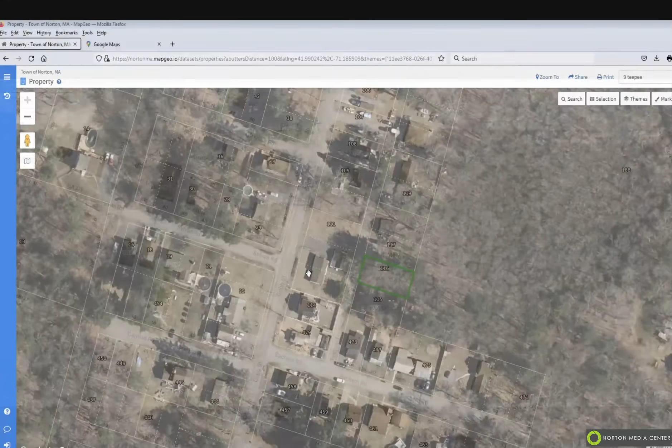This is the assessor's map with the aerial view overlay. Do you guys see that? Yes. So the green is the subject property. This is as far zoomed in as I can go on the assessor's map, so just bear with me. If you can see my cursor, I'll give us some reference points.

This street right here is Cobb, and then Sachem Road comes off of it this way to the east. And then Teepee runs north from Sachem. I have a couple further illustrations I want to show you, but while we're on this page, that's a town accepted road.

Sorry Cameron, I don't mean to interrupt, but is that a town accepted road, Teepee? I don't know, is that a private way? I think there's sewer service on that street, so I don't know if that makes a difference. Frank, is that an accepted street? Highway did accept that road. It was done prior to, I believe, Keith being in the seat that he is now. I think that might be back when Carl was in place. But yeah, there is sewer on there as well.

Okay, so Teepee Trail is this roughly north-south road here. Other abutters to the north are 11 Teepee. That's an existing home that just went on the market; I'm not sure if it sold or not. Further north, I show here 16, although it's the same side of the road—I'm guessing it's 15, maybe my eyes are failing me—but it's also on the east side of the road. My understanding, and Frank can confirm this, is that these two homes have service provided by private independent water lines that run down Teepee and tie into Sachem. I think that's the case, that's just my understanding of the lay of the land right now.

Let me see if I want to try and share a different view. Can you guys see that? Oh, move this window away from the shared application. Do you see the new window, the new graphic? I do not, same one. All right, let me see. New share. Combo, this one.

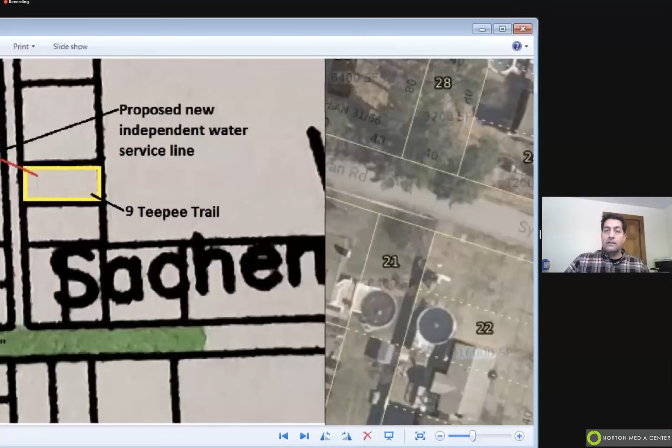Okay. There you go. Yeah. Okay, so this, now that we've had the perspective, on

Now that we've had the perspective, on Cobb Street we have an 8-inch main. This is a close-up of the sewer map on the wall outside the DPW, which I took a picture of. And this is the 6-inch on Sachem. The yellow is 9 Teepee Trail.

The proposal is to run a new independent water service on this red line across. This is 55 Cobb Street. We've spoken with the owners there, and they're on board if we're allowed to do this, to run the service across their line and then across Teepee, so that there's as little impact as possible, and then onto the property.

You're talking half the distance then, it looks like. Yeah, maybe a little more than half. It's a kind of strange little jog there, and we're doing that to avoid her garage. The field will be a little cleaner than this, but this is all the photo paint shop would let me do. Obviously, it'll be a little cleaner, but that's essentially it.

We put a curb stop off the property line over on Cobb, so that we can have control of the service there. And the size is going to be to standard, for however DPW would like it.

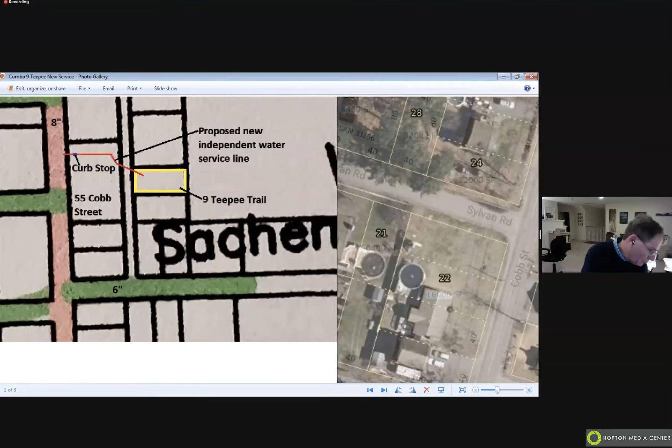Moving right along now, we are a little early for the West Main Street Cumberland Farms. Do we have people here from that group?

Nope, am I the only one that can't hear him? Tom has a real bad connection. Okay, yeah, I'm not hearing him. Oh sorry, Tom, we're having difficulty hearing you. Sorry. I'm John Marchand from Farland Corp, I can kind of give you an overview of our project. Thanks, yeah, trying to get you there, John, you're a little low on volume. See if I can adjust this.

John Marchand from Farland Corp, better. We're the civil engineers for the project. I'll give an overview of the project while Tom figures out his connection issue. Our project site is 60 West Main Street. If I could share my screen, I could show you the site plans that we have. That'll be helpful, great.

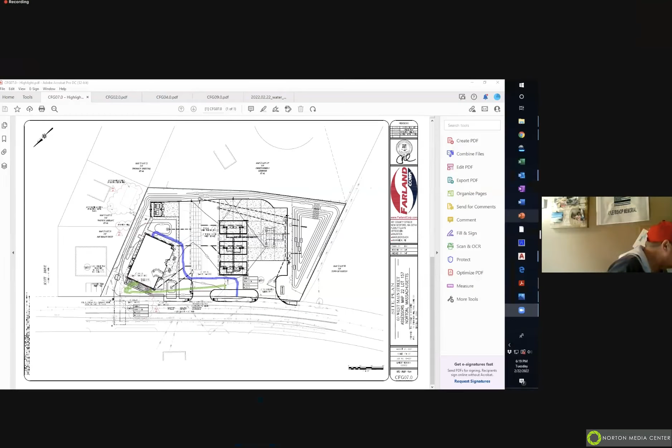If everyone can see this - so this is our site utility plan. The project site is 60 West Main Street. It was most recently the site of, I believe, a Bank of America. This is the Yelle School to the right of the plan. It's a vacant lot right now.

This project was originally submitted through site plan review planning board back in 2019. It went through a lengthy review process, reorienting the building and the fueling stations, and this is the final layout we got approved through all the other town boards.

It's a 4,384 square foot convenience store building. There are 6 fuel dispensers, double-sided, so 12 total fueling locations. We've got underground stormwater structures between the building and the dispensers, and a larger surface stormwater basin on the right side of the site. We've got two driveways off of West Main Street, looping around the fueling stations.

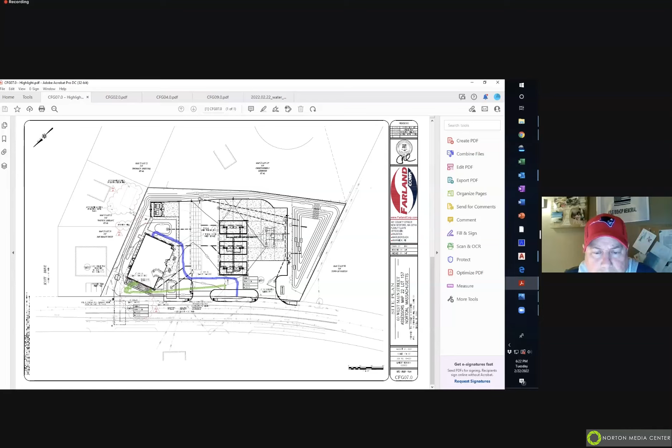Yeah, John, those tanks for the fuel - are those the tanks that we had talked about a couple years ago, where they were double walled or something to that effect? Please refresh me if that's not the correct term. Yes, these are double walled fiberglass tanks.

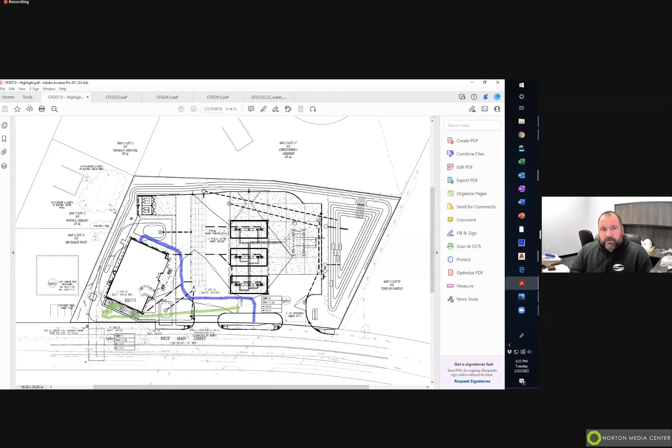Essentially there's an interior wall, and between the two there's a brine solution that's monitored. So if there's any fluctuation in the level of that solution, either from interior or exterior tank failure, it would be immediately picked up by the monitoring system, and we'd be able to fix it at that point.

All the piping is double lined. It's a pretty state-of-the-art fueling system that Cumberland Farms installs, and that did get approval through, I think it's the select board that issued the UST approval.

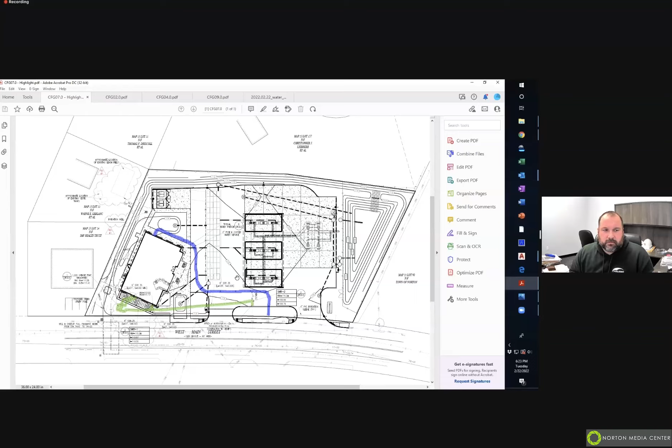Well, I think that we had spoken about that, and it was a pretty good setup from what I remember talking about. We felt that was the safest way to go to protect that area, which I believe is zone 2 - is that zone 2, Frank? It's zone 2, right on the edge, correct. Okay.

Yeah, we've been to multiple meetings, the previous board and myself, about this. Going back to 2019, there were quite a few slideshows presented, explaining the safety standards that Cumberland Farms has in place, with sensors between the walls of the tanks and multiple alarms and things. It was pretty impressive to see everything that goes in, another infrastructure that's in the ground, out of sight, out of mind. But nice to see the safety provisions that are in place.

This is a pretty basic setup here. Water on one side, sewer on the other, tying into existing stubs that were left. The 2 inch was brought across, I believe by the previous landowner during construction. They had paid separately to upgrade from a 3/4 inch service to the 2 inch that now supplies the property. And just recently, the Board of Health and myself went over the installation of the grease trap, and that was approved also by Board of Health.

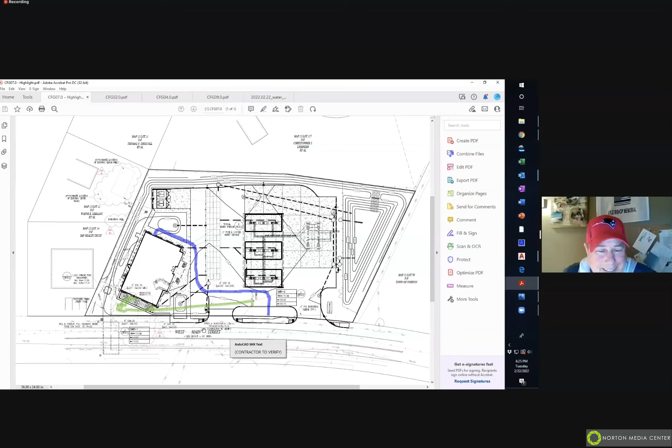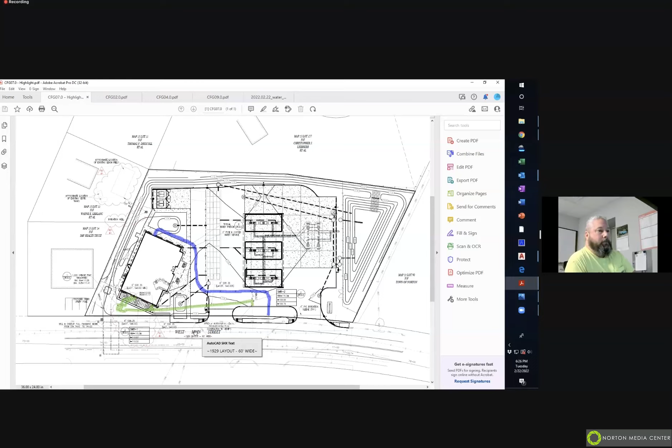Does anyone else have any questions about this? Do we have to vote to approve this, Frank, or is this what exactly? I do think, Steve, that you guys do need to vote to approve it. This would be the approval of the final set of plans, which is by bylaw. Okay, we want to do that now? Yep, we'll do that now. 60 West Main, correct? Correct. Right.

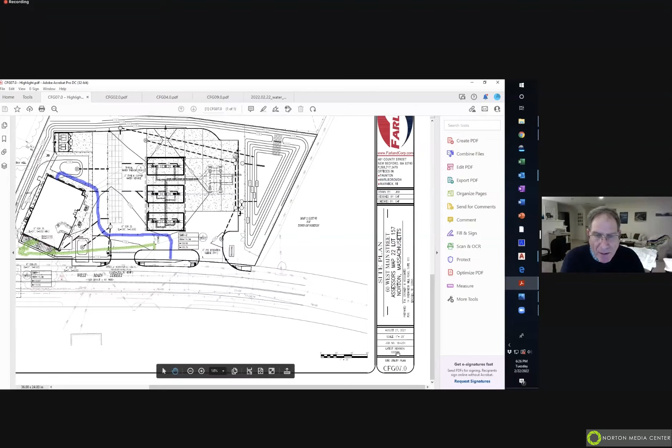I move that we approve the final plans for the Cumberland Farms at 60 West Main Street. You want to reference the plan? What am I referencing on that, specifically the date of the plan? The date of the plan, August 27th, 2021, is that right? Yeah, it's dated August 27th, 2021, last revised 2/9/22. Okay, so I move to approve the plans dated August 27th, 2021, latest revision February 9th, 2022, as the final set of plans for 60 West Main Street.

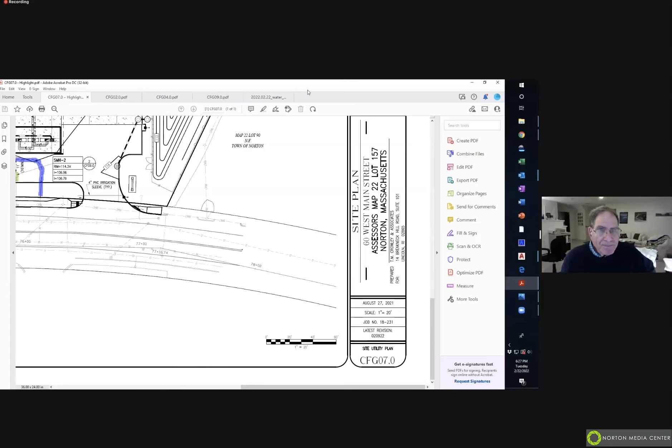I second. All in favor? Aye. Aye. Aye. Congratulations, John. Yeah, very excited about that coming into town. Good job, good job. Finally, something's going to be going in there. It's a long time coming. Good presentation, thank you, John. We appreciate it. And tell Tom we appreciate it. Thank you, yeah, thanks guys. Thank you.

All right. We got Weston & Sampson with us. Do you want to start with Tara? Give us an update? Sure, sounds good. Frank's covered an awful lot there, so I don't really have too much more to add.

Just to clarify, we are going to be submitting our certification for well 5A activation tomorrow, with the caveat that the system will be ready to be placed online once the absent bacteria test is received, and we'll forward that to DEP. I just want to give them the actual letter so they have it in hand so they can start drafting their response. So we were working with Frank today on that, sent over some photos, and I briefly discussed, sent over the photos one-on-one to DEP, just to let them know it was coming and imminent this week, so give them a heads up. So that's all good.

They also gave us certification approval to place well 3 online as far as the new CT piping, and as Frank indicated, there's some work on his end that the water department needs to do, but that's in the works. We'll work with Frank on providing some additional documentation for well 4, construction, siting, and design of the wells and drilling, as the Auchincloss funds may not be available like we were originally hoping for. So make sure we get that in so that we're ready to go for an annual town meeting for well 4.